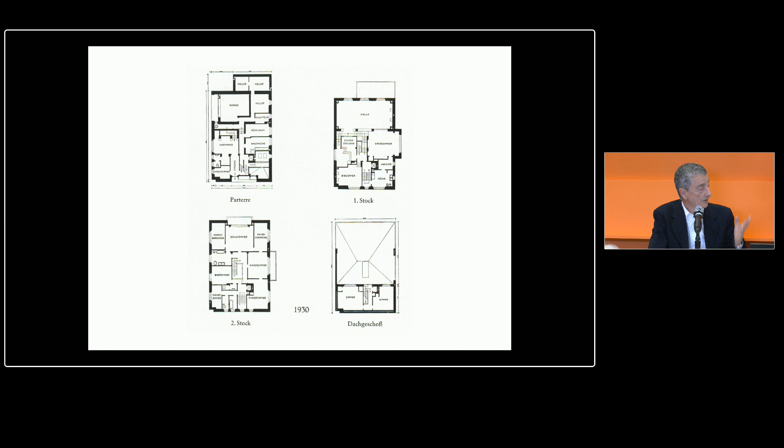One is Adolf Loos. I show you very briefly the house that you know, the Haus Müller in Prague. I was fascinated by the complexity that he could display in the interiors, but hidden in a core of utmost simplicity, almost of subdued expression, and this contrast between the outside and the very lush inside with incredible materials, with incredible spaces, I found extremely appealing and interesting.

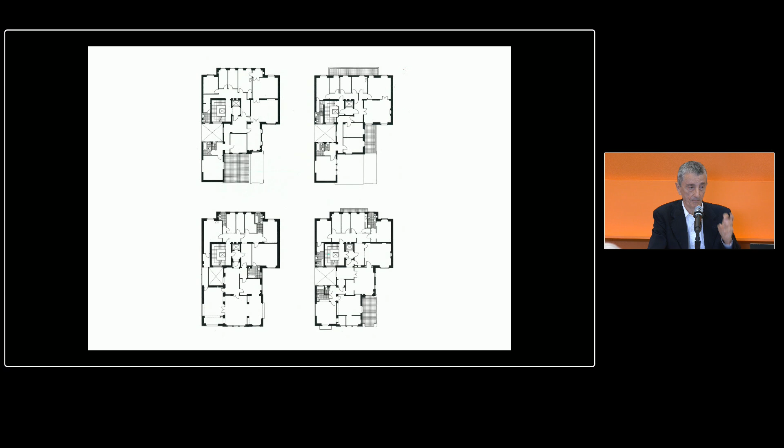I found also interesting the transformations that his doctrine had in houses like Casa la Meridiana in Milan, by De Finetti, who was a student of Loos. I was fascinated by seeing that modern architecture did not need to express its modernity like a manifesto, but could blend into the city fabric, like in this very beautiful house, could use traditional elements like a corniche, like a sundial that was done by De Finetti's friend Gigiotti Zanini, a very interesting person, and still could have this interesting and complex and very well done floor plan.

This is just an image of that, and maybe the person to whom I owe most is Giorgio Grassi.

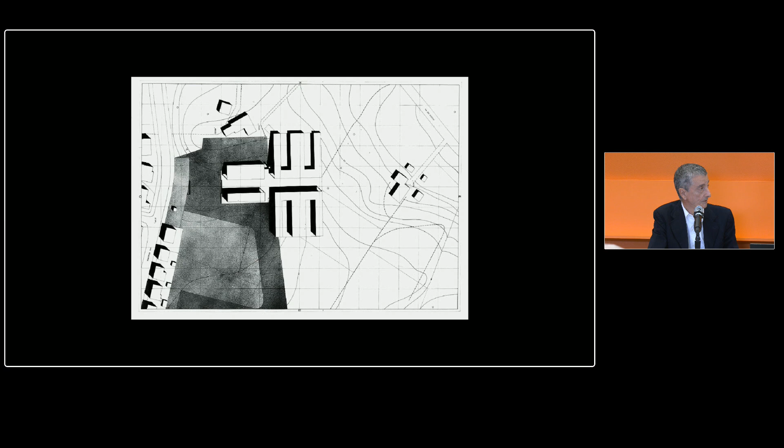I show just one project, the Casa dello Studente in Chieti, which he did together with Monestiroli—very simple, structured student housing, very strict, very rational. These are the floor plans, and this is the most famous, I think, rendering. It has been built, but I don't show it how it was built because it was not built well. I think this image is much stronger.

I was never a student of his, I never worked with him, we just had a very intense connection. And from him I learned a lot of things that have really helped me in my search for an architectural language.

One thing is that architectural language should be very rational, so it should stem from function and from construction, but also that it should be linked with history—that history, and all history, not just the history of modern times, but all history, would be the basis of an architectural language. And of course you can see that this owes a lot to Weinbrenner's famous arcades.

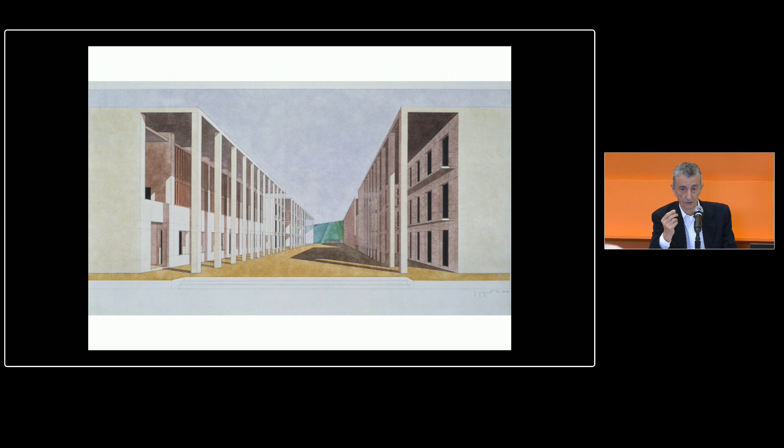I learned also that architecture should not look for novelty for its own sake, but could be something very relaxed, something that should strive—this is very difficult to do—for timelessness, rather than being linked to a certain time and a certain fashion.

And what I then added a little bit to it was, for me, the obligation towards the city, the obligation towards the public spaces of the city, which in some way does not allow one to do everything in architecture, but means to restrict oneself to the very essential elements, and also to be attentive to the context, which is not a contextualism, but a very difficult balance between the autonomy of architecture...

That has nothing to do with the autonomy of architecture taught by, I don't know, Peter Eisenman, it's rather an obligation somehow to blend into the context. I think my five minutes are gone.

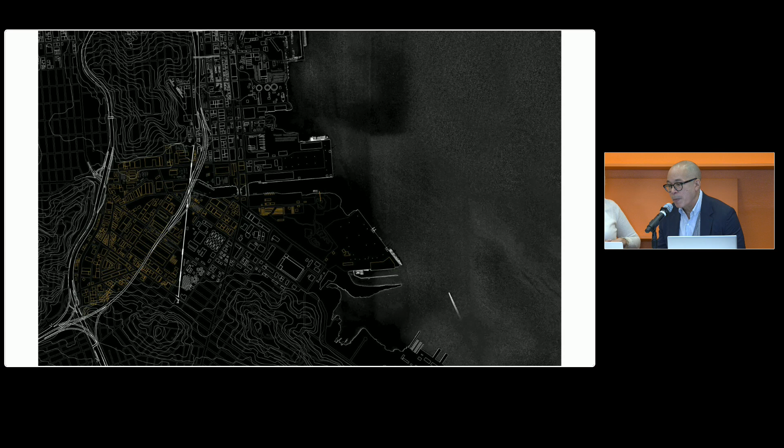That has been the underpinnings of my pedagogy as a teacher, and understanding analysis as a creative endeavor. This is a project by a student from USC back in 1996, documenting the former area of Dogpatch in San Francisco, looking at certain built environments that would not traditionally be part of the conversation, but that do solicit a certain degree of inspiration about tectonics, relationships, and form.

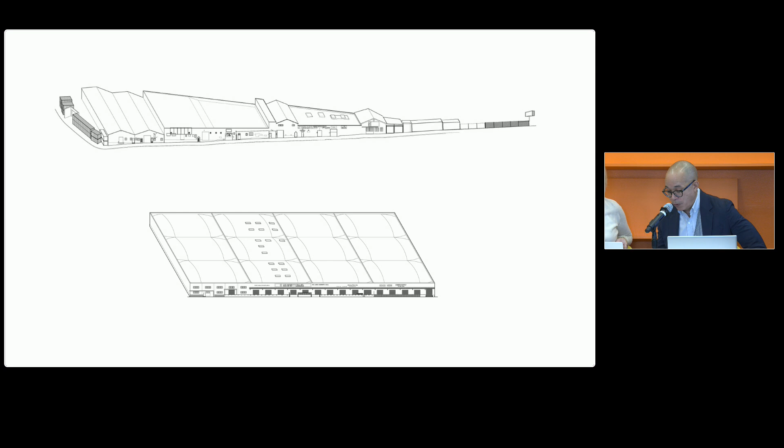I think in closure of the recent past, one of the things is the opportunity to articulate ideas about architecture, about its relationship to the social political landscape of our cities, of people, of institutions, and writing becoming a form of creative expression, but also of articulating one's thoughts.

Well, my present... let's say the interaction with Giorgio Grassi gave to me basically two things—one, not three things. One, a kind of common friends out of history that I had not studied in my normal classes, like Heinrich Tessenow, a very interesting German architect of the 20s and 30s, or Fernand Pouillon in France.

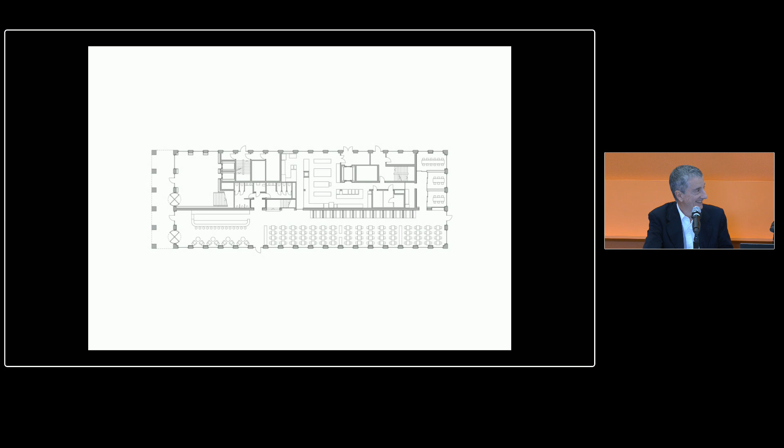This is the floor plan, a ground plan. It's an office building, but with actually a very good and very well designed Italian restaurant on the ground floor, and that's the upper floors.

We played here, or tried to play the Adolf Loos card, creating a very simple facade. It's made of rather thick stone, but it's very simple. It is very domestic—we wanted to do an office building that would have a kind of domestic attitude. It's not quite as simple as you may think from this photograph, but it is very, very simple.

In any case, it stands out by its simplicity from the row of buildings of very famous architects like SANAA, Peter Märkli, and here in the front, Rafael Moneo's building. We were interested really in not standing out. Ironically, the building somehow stands out because it doesn't—but that was really not intentional. So it's really a very, very simple facade.

We were very much interested also in the construction, so the stone is not applied—it's not clad in stone. The stone bears, it bears only itself. We've changed that; I wouldn't do that today anymore, but at least it holds itself. So the facade is, let's say, self-bearing, but it doesn't hold the whole building. Under and behind that there is a concrete structure.

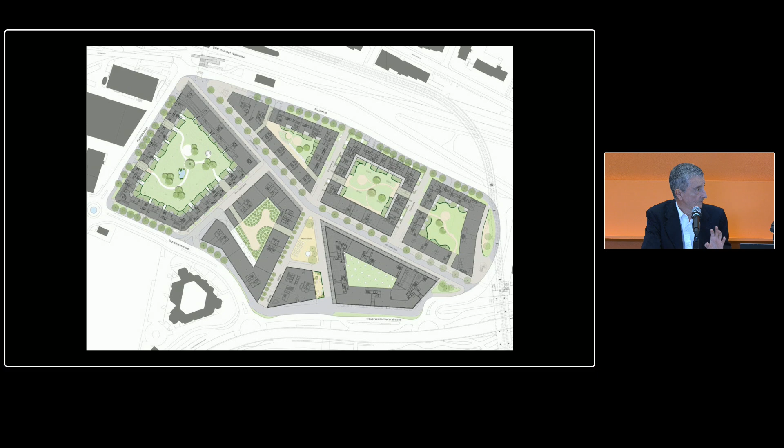The second one is, you mentioned it too, Grace, the Richti, near Zurich. It's a district, a kind of urban quarter. Again, we did the master plan. This was interestingly enough, or surprisingly enough, a competition that we won for reasons I still don't quite fathom, and so we could control it quite well, and we built one building, the building on the right. So it's a big perimeter block with a large garden inside it.

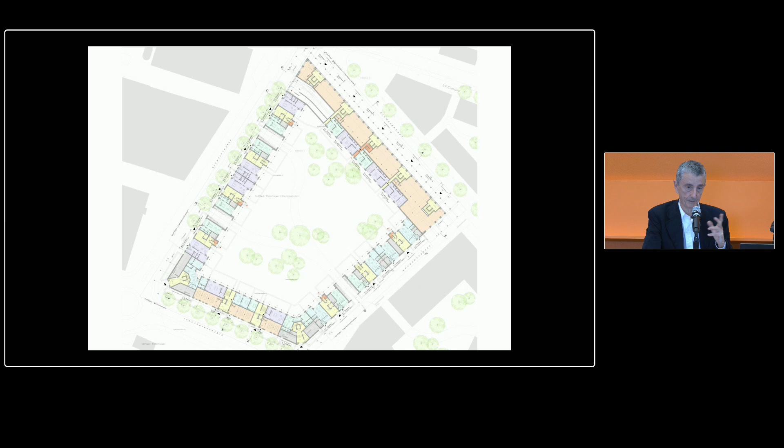It's all housing. So on the ground floor, it's restaurants, very classical restaurants and shops, not in all buildings but in most of them, and along the main street. And then it's residential. This is the main street. This is our building, and this is the facade.

I admit it's not exactly what one would say, it's a very varied facade, but that was exactly what I wanted to do. I wanted to do an absolutely uniform facade. It was not that easy because the client asked us to modify it, to put variety in and to change it, so we had to do mock-ups and things like that. I was interested in having a facade that is very, very straightforward, very urban.

So it has an arcade as a kind of gesture towards the street and the public space. It has no balconies whatsoever, because I don't like them on a main street. I think that urban architecture should be very strict towards the street and not allow too much inside into its private realms.

We do have balconies, relax, we have balconies in the apartments, but on the other side. We have all these French windows with shutters. Doing a shutter in Switzerland is really something I'm proud of, because they don't know shutters and they didn't want them, and they wanted to put motors in them, and because it's impossible to open it, nobody will ever open it.

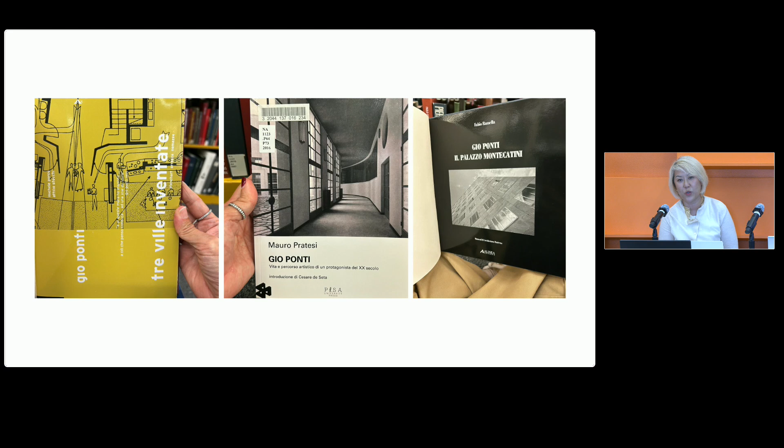Apart from that, one thing I did try to do while I'm in the building is whenever I have time, I go down to the library and try to go through all the Gio Ponti books in the Loeb Library. The reason for doing this is because two years ago, I had the opportunity to visit a house he designed in Hong Kong. Gio Ponti actually has a few projects in Hong Kong too, one is a department store building he designed for a businessman called Daniel Koo, who runs this department store.

So he designed a mid-rise building. But a lesser-known project is the residence for Daniel Koo. It was built in the late 60s, and it's rarely been published.

There's very little information about it, and I got an opportunity to visit this home, which was amazing. Daniel Koo still lives in it. It's pretty much kept to its original design, with this very gently sloped roof and these beautiful custom-made ceramic tiles, like this, really like the size of an egg on the facade.

So while I was visiting this house, I had digging through the house. When I was in the basement, I came across this model, and it's a model of a house that Gio Ponti designed also for the family.

But this one was in the US, in Marin County, California, and it was never built. But I have seen drawings of this house, because he did this very provocative series of drawings of the plan of the house based on the brain. So it started with this, and this was the eventual plan of the house. It never got built, but the model is still sitting in the basement somewhere in Hong Kong.

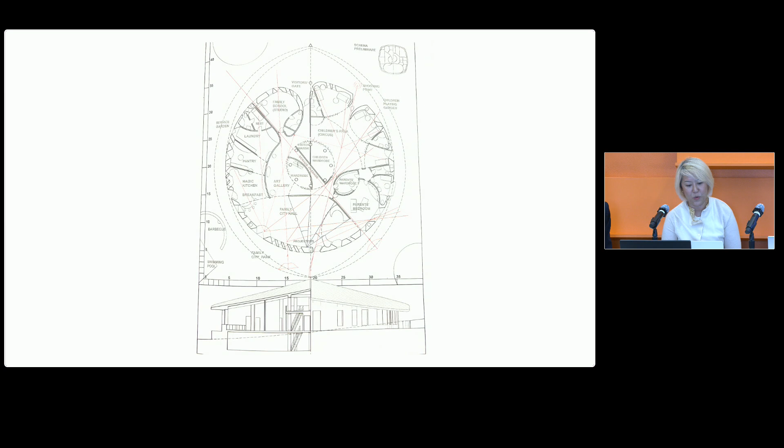Gio Ponti was the founder and editor of Domus from 1928 to 41. He took a break, and in between he was the editor of Lo Stile from 1941 to 47, and then he went back to Domus again as the editor from 48 to his death in 79.

Grace also mentioned Vittorio was also the editor of Domus from 1992 to 96. Is that right? Yep. So even though Vittorio is showing us mostly his built projects today, that's definitely something I'm interested in talking to him about, in terms of how, similar to Gio Ponti, his practice, in addition to built work, his editorial work and his writing is also important.

And coming across this, this is one of Gio Ponti's books, called Amate l'Architettura, In Praise of Architecture, published in 1957. It's really presented as a collection of ideas, presented in a non-hierarchical way. So the material is quite heterogeneous. It includes pieces he wrote for Domus and Lo Stile. And in a way, it's not important to read it from beginning to end—you can kind of dive in, dive out, like a cookbook or a dictionary.

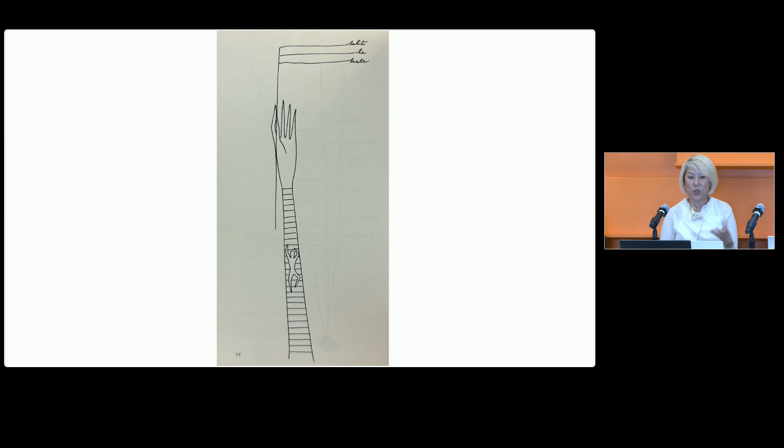In one of the articles he wrote for Lo Stile, in the March 1944 issue, titled Invenzione di una architettura composta, Invention of a Composed Architecture, he writes, and I quote: 'My character does not possess a natural predisposition for the formulation of principles, the construction of theories, or the rationalization of terms in their totality or frameworks of thought. The development of ideas occurs more often than not by nature. It espouses the versatility of my temperament, manifests itself periodically and via revelation in action.' And this translation was done by Massimo Martinoni.

And I became interested in his way of nonlinear thinking, between his thinking and his working, and this discontinuity between his writing and his works, and also the scope of his works. I mean, mostly here I'm showing building projects, but also, for example, the works he did for Ginori, the ceramics company—that's how he got connected to Daniel Koo and his shop business. The scope and type of work that Ponti has been involved with also reminds me of Ben Thompson, whose building and the company Design Research is the site and topic of the studio that Vittorio and I are teaching this semester.

It's a place—you're familiar with this building on Brattle Street—a place where architecture, interior, furniture design, food, music all have a kind of equal place at the table. And in that way, I think Ponti's search for a language through action, through design, across multiple design disciplines, is not done necessarily through building a well-argued narrative.

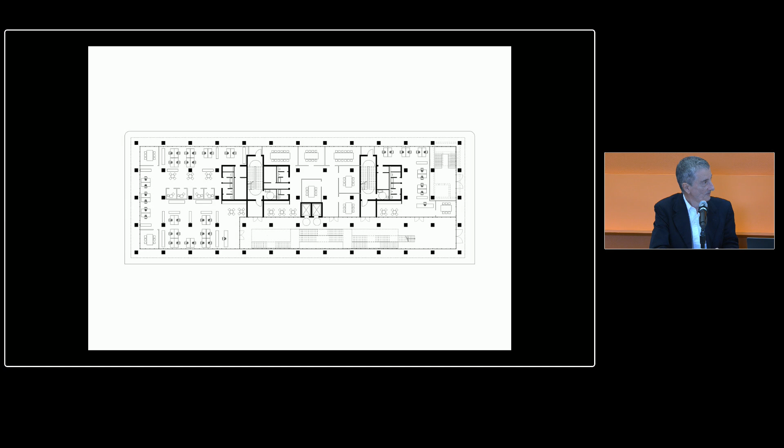So this would be the floor plan—the big columns you see are made of stone. When I proposed this to our engineer, he told me I was completely crazy and that it would never work. Then he called me a day later and said he'd looked into it more precisely, and he thinks it would work, and would even be pretty simple if we use concrete floor plates and stone columns no higher than 3.5 meters, which is okay I think. We have 3.80 meters, but it's okay. So this was the floor plan, or these are the two floor plans.

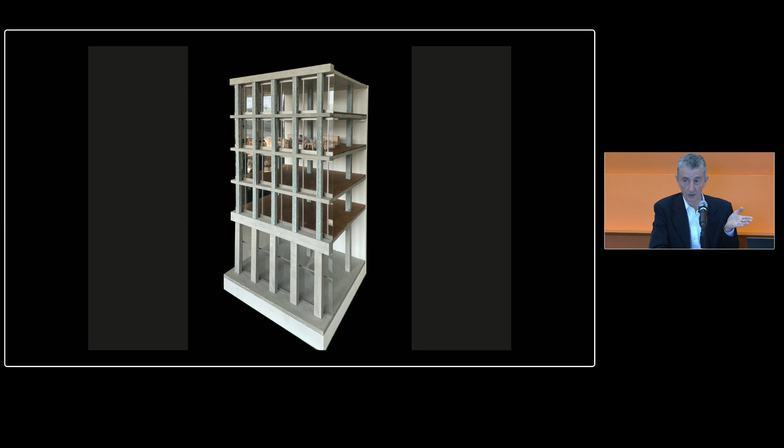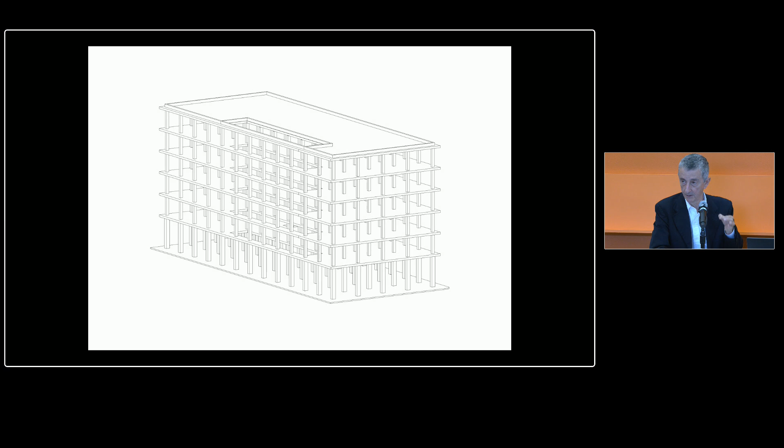There are issues with insulation, of course. Pouillon did not have these issues, but it's pretty cold in his buildings. So in our case, in this building, we decided to use this structure—all these very simple columns and floor plates—and to have a stair.

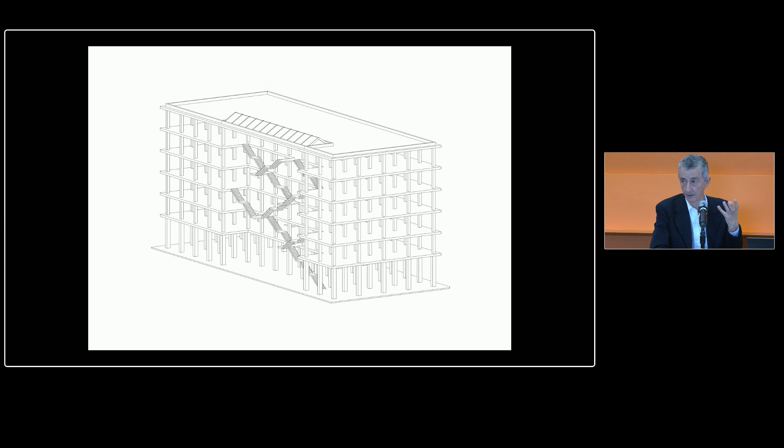I'm very interested in stairs, I admit. To have a stair as a connection of the floors, but also as a place of encounter and communication, and then to put a glass facade all around it, so that the columns are protected, but can be viewed from 360 degrees from all sides.

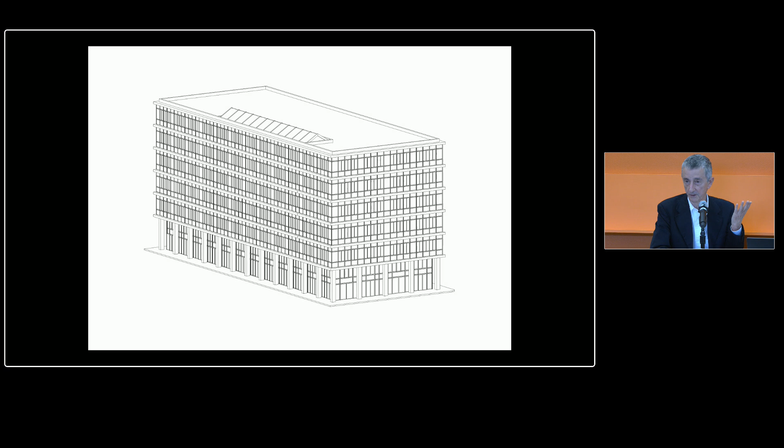That was important. In the ground floor, we do exactly the contrary. We leave the stones out, and the facade is it. But the facade never touches the stone, because otherwise you would have to put the insulation there, and you would not see the stone. And the stone becomes...

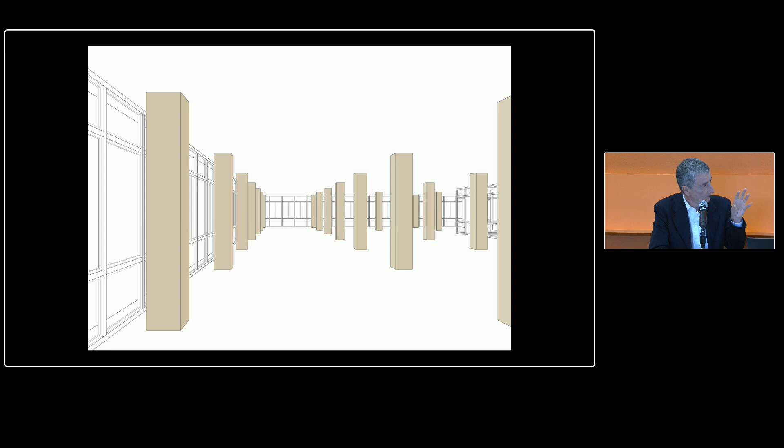We are testing it. We are really, literally, and we're doing it right now. We're testing how it could look. So this would be, let's say, the theme of the stone columns.

The stair should really be a kind of labyrinthic element, like in Piranesi. So it starts on the ground and then becomes something very, very complex. In a way, a contrast to this basically totally simple building.

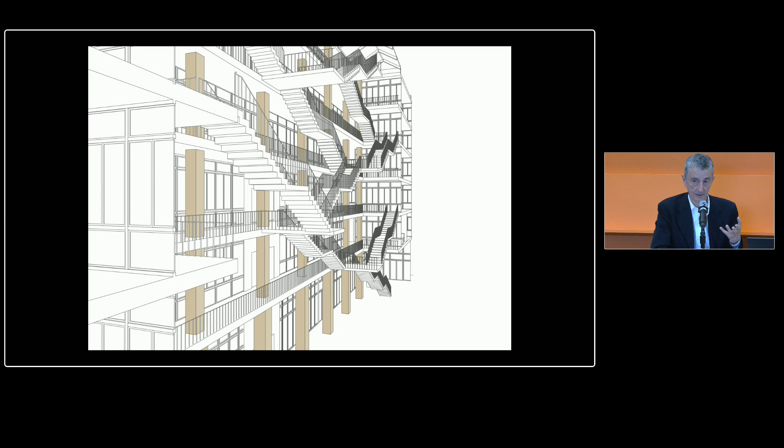It's a loft. We're doing a loft, also because we don't know, or at least I believe that we don't know, what an office building in 5 years, 4 years will be. And this is, let's say, a first idea of how the interior could look. So the stones, the stone columns really become a major presence also in this interior.

Can you move just one further on? Yeah, thank you. And this is how we imagine this building to look like. We're thinking of a sandstone, of a rather strong sandstone that brings also a little bit of color into this building.

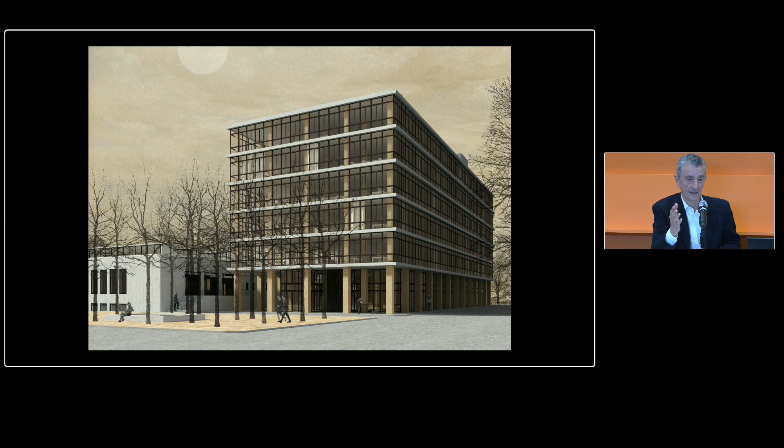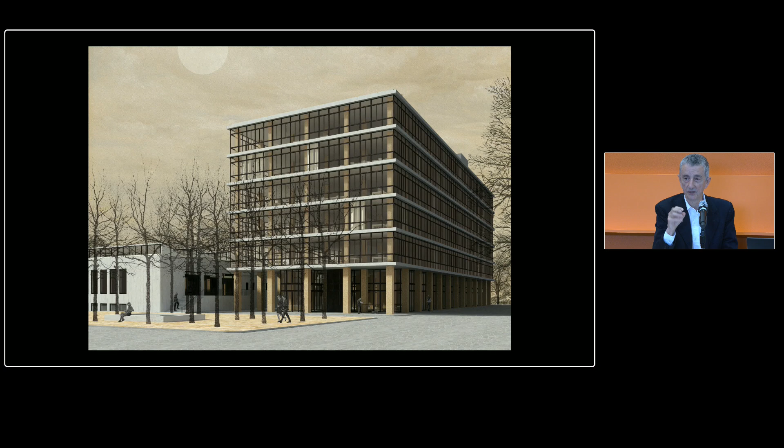But the real idea is to have a building that is made of elements that, energetically or in terms of CO2, cost practically nothing, if they are cut, as long as you cut them in the quarry and don't fuss around with them anymore. If you start to change the surface and modify it, it becomes expensive, both in terms of money and energy.

But if you use them raw, and I would like to have them raw, then they are pretty cheap. Actually, they cost less than concrete columns, and energetically okay. Moreover, you could reuse them.

I mean, this is a fantasy that I always have, that these elements can be reused, like the Roman columns were reused in the first Christian basilica in Rome, or in the Great Mosque in Cordoba.

I think that, I mean, this is just an experiment. We don't know if we will succeed. It's only one way to do it, but it encourages me in thinking that if we take the responsibility that we have towards our world really seriously, we can also make good architecture.

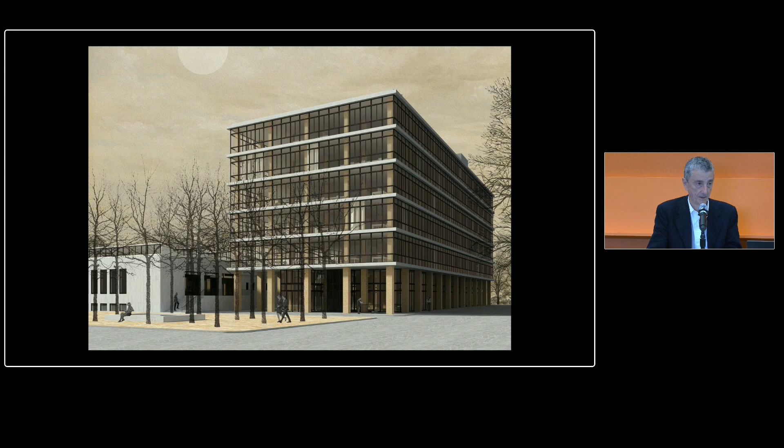So one of the things is always that the future is closer than we think. And I know I cheated when I talked about the present. My present is looking at the past and thinking about Gio Ponti's work, which, when I was looking through the books, I found this library card in one of the books.

which I think is important. And what I'm kind of thinking about as our module studios are coming to a close and leaving here is also thinking about how to come back. Because of this opportunity, such as this series Positions, to be able to engage in conversation,

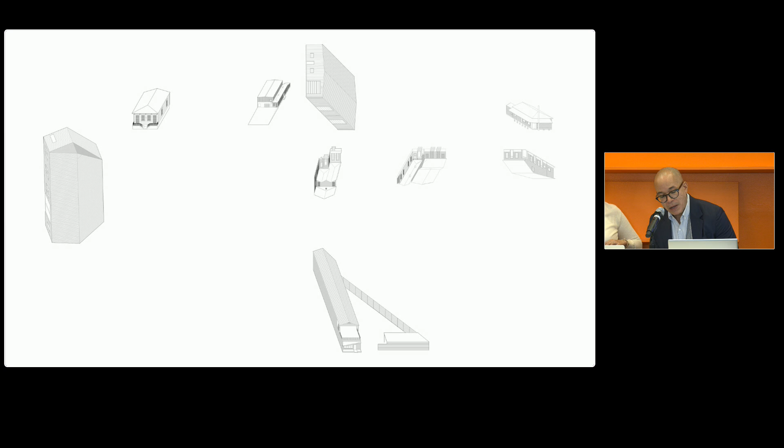The idea that these two frames of mind, or two ways of thinking formally, could collide, coexist, or combine with one another to produce a notion of ambivalent form that is neither one nor the other, I think is something that begins to talk about the idea of positioning. I think it is also possibly something that Clover and I both share.

Another key element for me was writing an article for the emerging practice current interest. What drew me to their work, and to the decision to write this piece, was that unlike many practices currently active that are taking on the challenge of including voices from individuals and communities that have often not been part of the conversation, they, in my mind, as designers and thinkers, are very interested in constructing dialogue.

Rather than being an affront to the discipline and to the canon, it is about turning up the volume and growing the conversation to an even louder crescendo, where issues involving all sorts of cultural references and cultural interest, and formally, the way we think about the richness of the discipline, is through the accumulation of things. That was something that drew me quite closely to this.